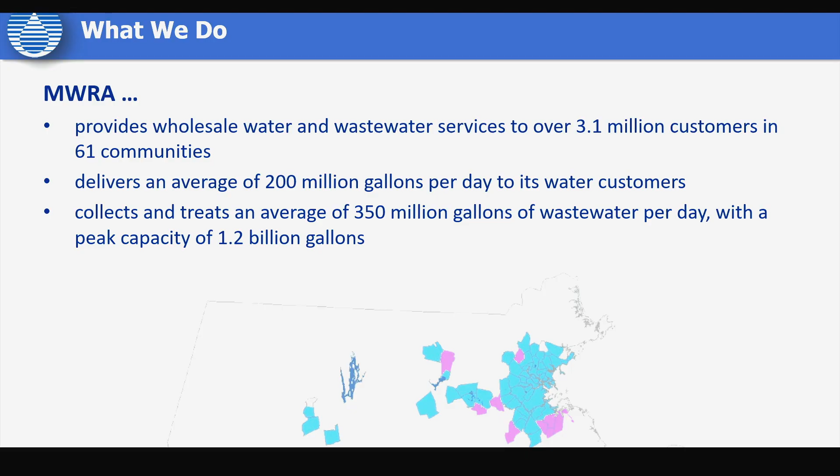What are we? We serve 3.1 million customers in 61 communities. On an average day, we'll deliver 200 million gallons of the best drinking water in the country. On the wastewater side, on an average day, we'll transport and treat about 350 million gallons out in Boston Harbor. In a storm, we can handle 1.2 billion gallons of wastewater. We are the wholesalers. We sell to the cities and towns, and they then turn around and put a markup for the retail rate.

Our main sources of water are the Quabbin Reservoir, north of Springfield, and the Wachusett Reservoir, north of Worcester. All combined, those reservoirs hold up to 5 years of storage if we ever needed it. And that's a far cry from most of our other peers around the country who on any given summer will be below 50% full. We're lucky if we ever get down below 90%. So we have ample water. It's great water. It's the cleanest water in the country, and we'll talk about that in a little bit.

And part of it is the mere size of it and the fact that we own incredible amounts of forest land all around the reservoirs. So the pollutants have no way to get into the water because we own the watersheds. It's a civil engineering marvel that is recognized around the country as one of the great water systems ever built in this country. The Quabbin Reservoir is over 500 feet above sea level.

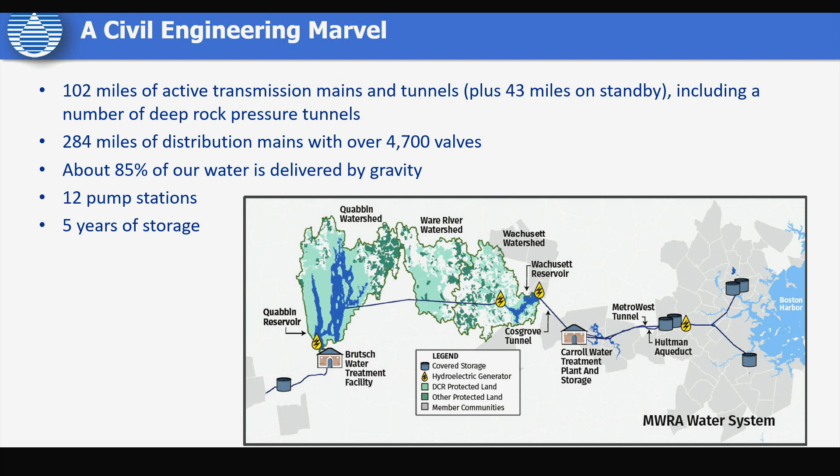The water travels down through tunnels to the Wachusett and then over to Marlborough, and then it drops down into Route 128, and all of it is done via gravity. Once it passes into the tunnel out in Clinton, it doesn't come out until it hits Route 128, and so we are safe there. We have the public health.

We are a public health agency, an environmental agency, and frankly a finance agency and a construction agency. But our main focus is being a public health organization who's responsible for delivering clean and ample quantities of water. And one of the things that, well, I'll wait till I get to another slide on this. We've received all kinds of awards, we meet all the federal requirements. Everywhere you turn, people say, hey, I've got the best drinking water in the country. And people agree, it really tastes great, and it does.

One of the things that people don't think about is the history of the creation of the water systems throughout this country. People understand the need for drinking water, for sanitary things, and all that. That's critically important. But the thing that really drove a lot of the construction of the water systems across the country were massive fires, where the urban areas in and around this country, whether it be Chicago, New York, Boston, or Salem, Massachusetts, didn't have the pressurized water, and they couldn't fight fires.

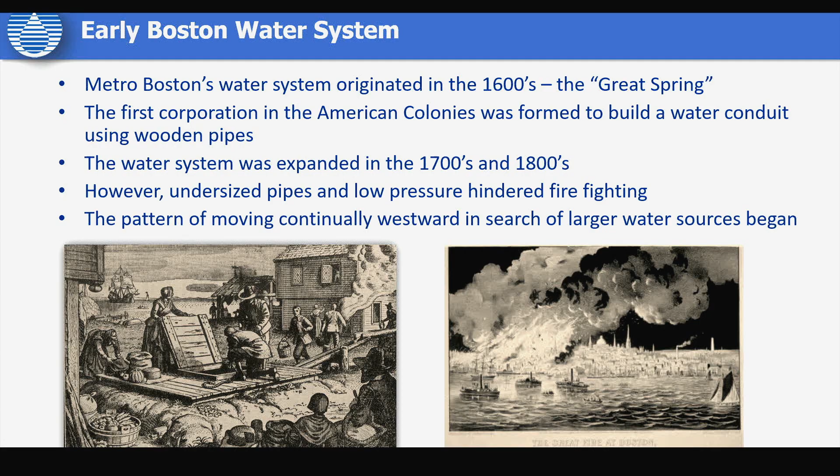They had bucket brigades and things along those lines, hand pumps. But it wasn't until these fires that folks realized we needed to get pressurized water, and we did. The Cochituate was the first part of that expansion from Boston west, and this was a storage tank that was behind the State House, and that has since been eliminated.

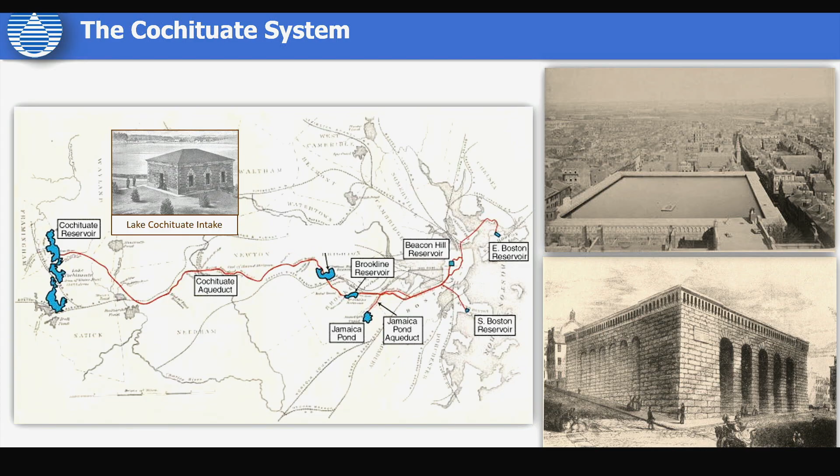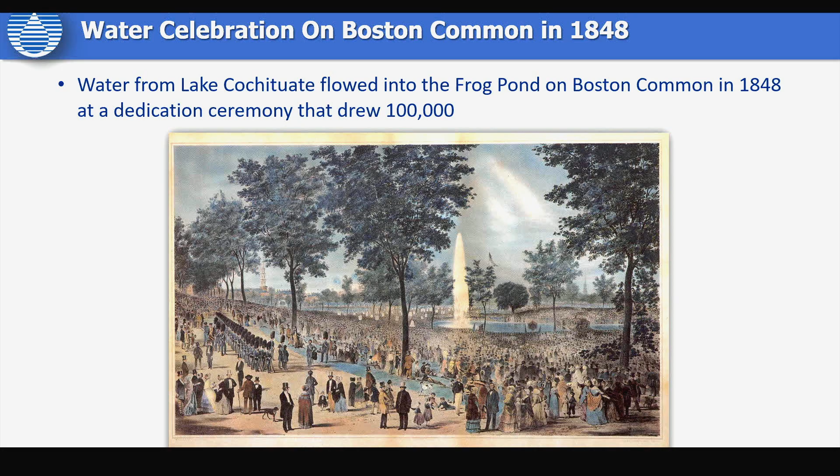The Cochituate system was the first system as part of this drive west. Here is the celebration for the opening of the Cochituate down at Boston Common in the Frog Pond. Over 100,000 residents came out to celebrate this great engineering feat. The history of the Massachusetts water system is basically drive west, drive west, drive west until you get enough water.

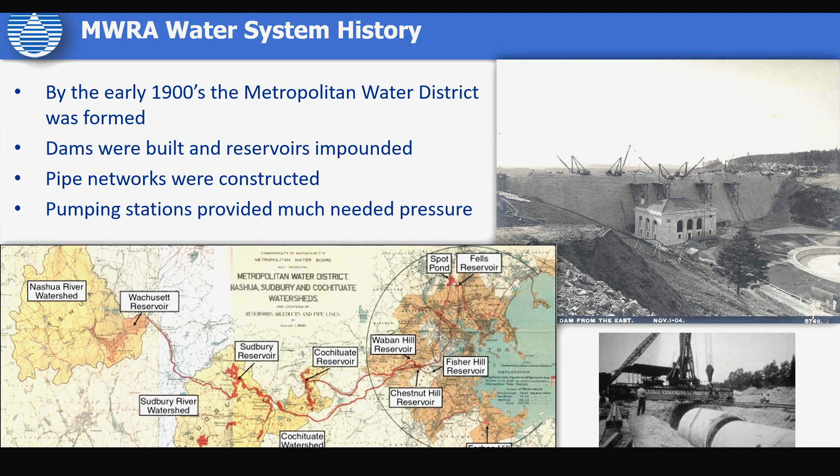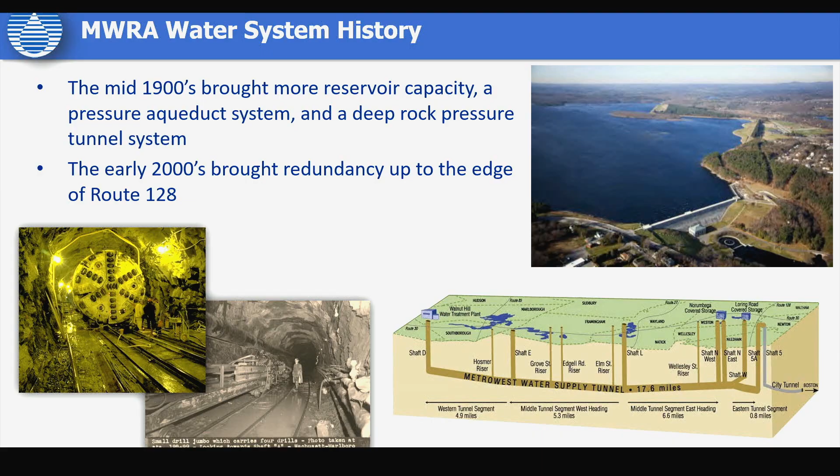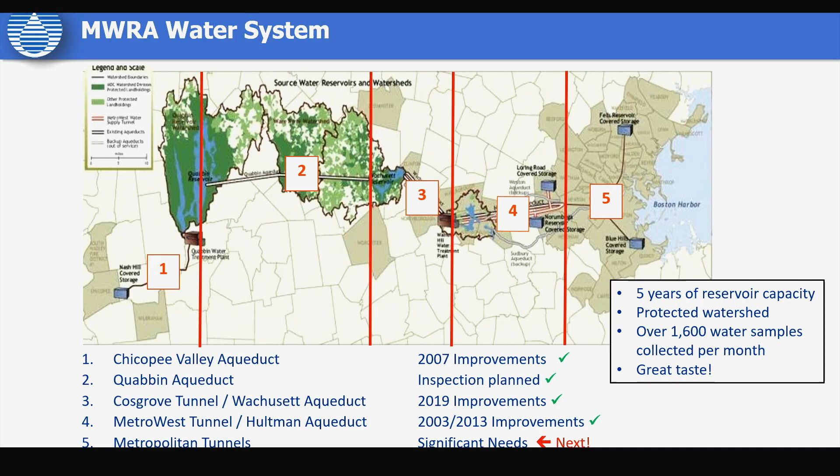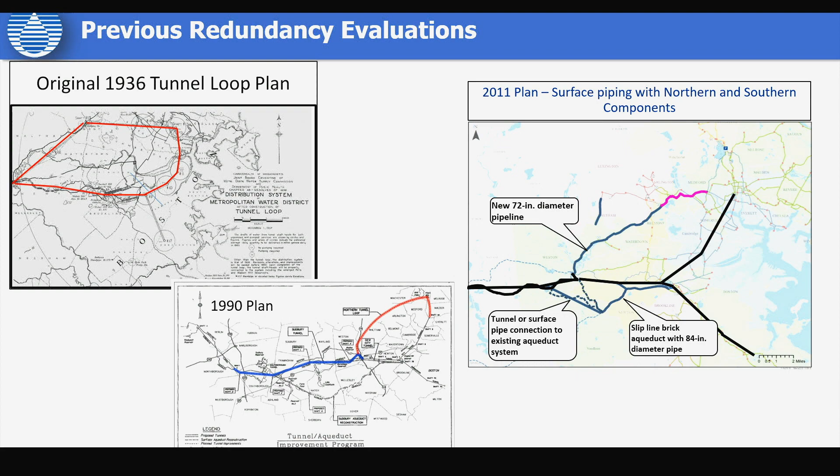We break our system into 5 separate areas, and we strive for redundancy in each one of those. We've been very successful in it, and the system is bold in its investment and its results. We're here today to talk about a tunnel loop that would complete the Metropolitan water system. And it's important to keep in mind, in the 1936 master plan, this tunnel that we're going to talk about tonight was outlined in concept as something that we needed to do as a water system. Now we sit here years later in the planning stages to make it finally happen. And when we finish this, we will be completing the Metropolitan water system that was envisioned over 100 years ago.

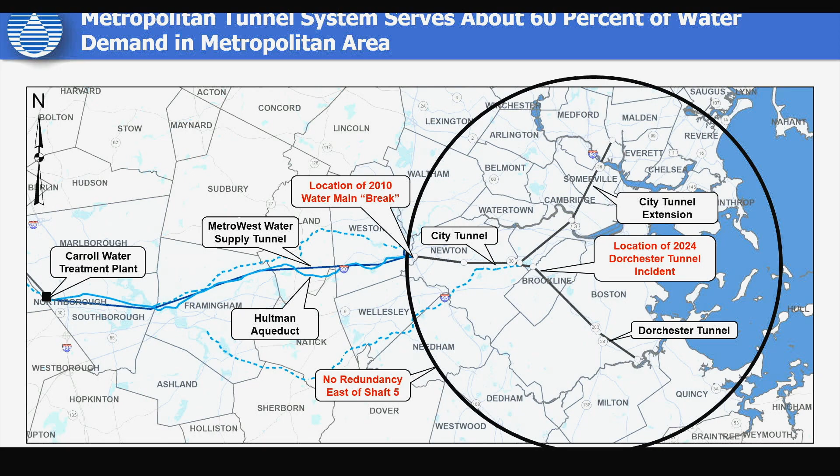The area that we're dealing with inside the circle is about 60% of the water demand in the metropolitan area. And I would say, without being accused of being an alarmist, if we had a major water main break inside of this circle here, there would be the possibility of deaths, as we'd have so much water, and it would just be ugly. And we also have to maintain what we have. And these are examples of parts of the water system that are just very, very tender. The potential of an accident is serious, and we want to move forward with this tunnel program to get rid of these things and build a new redundant tunnel.

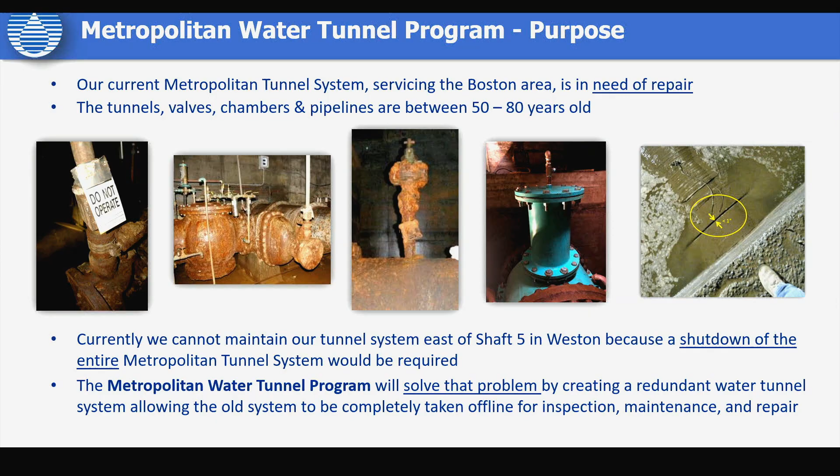Here we go. If we had a major water main break, I'm going to give you a sequential. This is what would go dry first. These areas would dry first as the system drained itself out. Here's phase 2. And it would be ugly. It would be serious. And in the Great Water Main Break of 2010 we got a taste of what it's like to have a major water break. And I can assure you, we don't want to live through that again. So anyway, the goal is full redundancy.

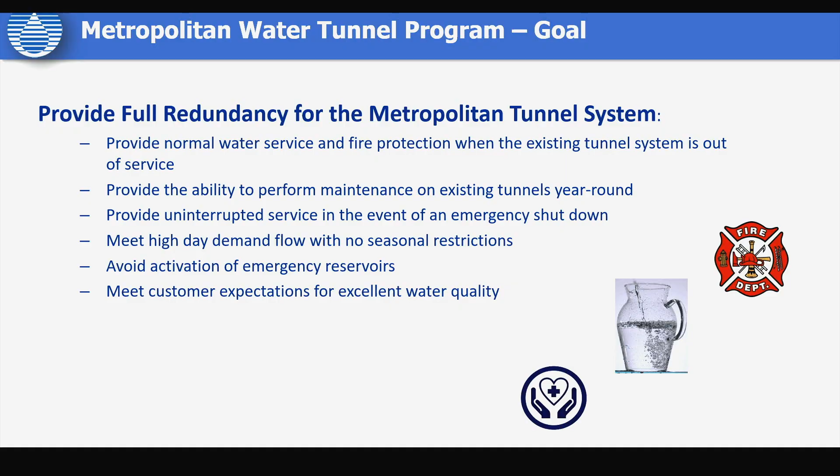Kathy is going to talk about it. And anyway, work for you.

Okay, thanks, Fred. So for the rest of tonight's presentation, Paul Savard and I are going to walk you through the tunnel program. We're going to spend a bit of time talking about how a deep rock tunnel system is built, the status of the program today, and what's to come in the coming years. It's a large program. It'll take many years to complete.

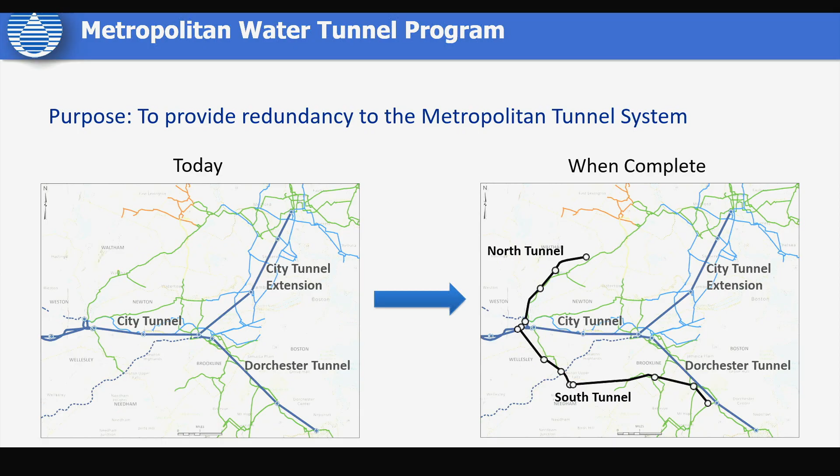So today, as Fred mentioned, we have our existing Metropolitan tunnel system within the Metro Boston area. It's 3 deep hard rock water tunnels. They are about 19 miles in total. When the new tunnels are online, we'll be adding 15 miles of similarly deep hard rock pressure tunnel that will provide full redundancy for these existing tunnels. We'll be adding 13 new shafts to connect the new tunnels to the existing MWRA system and local water infrastructure. And the connections to the local water infrastructure are important because they provide resiliency not only to our system, but to local water infrastructure as well. And as Fred mentioned, it's been in the works off and on for roughly 100 years.

So what is our program? So the Metropolitan Water Tunnel Program, it's really a once-in-a-generation program. They'll provide benefits for years and years to come. It involves the construction of 2 separate rock tunnels. These tunnels will be between 200 to 500 feet below ground and constructed entirely in bedrock. We need 13 shafts to build for construction or the water system connections.

Both tunnels start in Weston near the intersection of I-90 and 95. The north tunnel will head north into Waltham. It's about 5 miles, just shy of 5 miles. And the south tunnel will head east, southeast over to Mattapan. And these tunnels are designed to carry a high day demand of 283 million gallons a day. That's a lot of water.

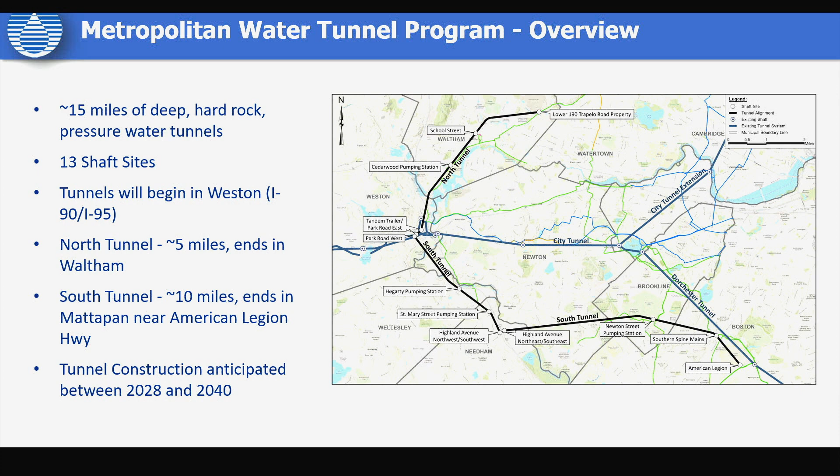So how are we going to build them? The new tunnels will be constructed in 3 segments. We don't build them all at once. And we'll be using tunnel boring machines, or what we call a TBM. And if you're not familiar with a tunnel boring machine, there is a model of one over on a table over there. Take a look. These are really, really marvels of engineering, and they're very sophisticated. So take a peek at that model.

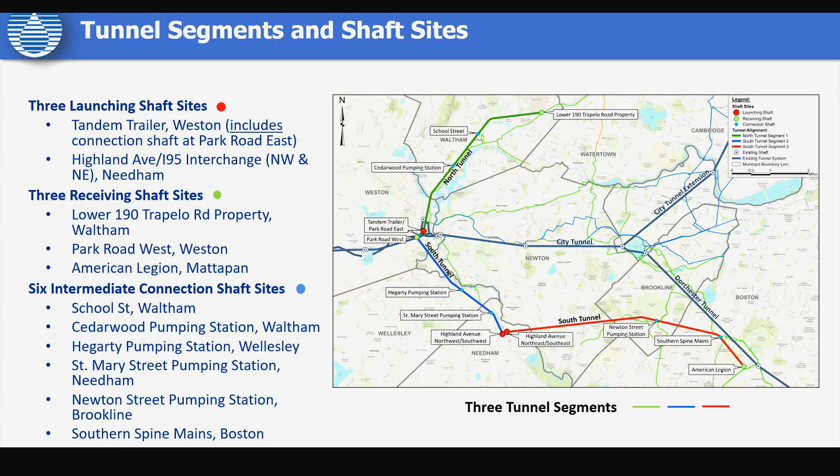So each segment of tunnel is going to have its own launching shaft, its own receiving shaft, and intermediate connection shafts. The launching shafts are where we launch the TBM, or where the mining starts. The receiving shaft is where we receive the TBM or mining stops. And the intermediate connection shafts allow for those added connections to our system or local infrastructure, and that provide that real redundancy. Paul is now going to walk us through typical tunnel construction sequence, review the work completed to date, and some of the work that is yet to come.

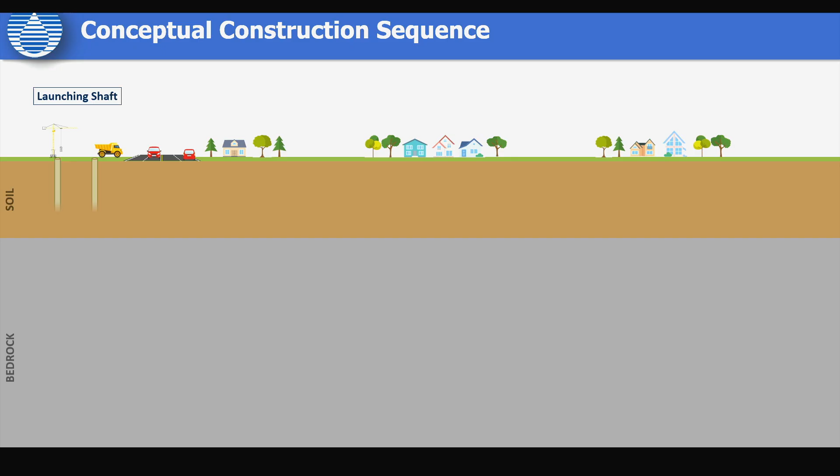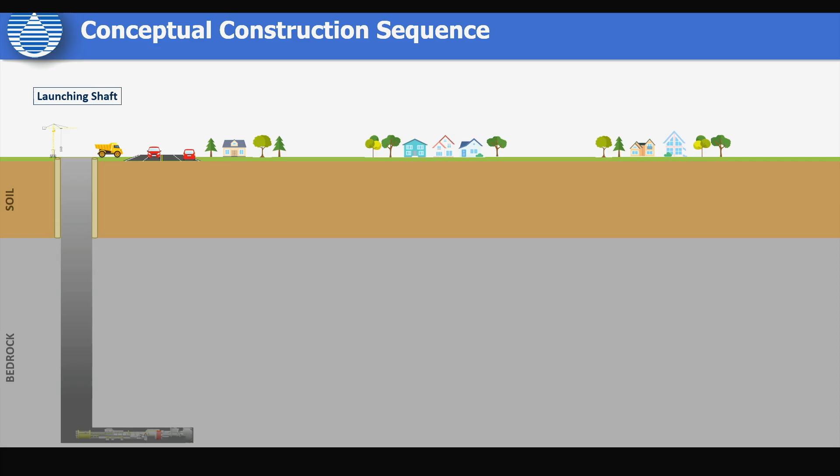But the first step that the contractor will end up doing is they have to mobilize to the launch shaft and prepare for constructing this launch shaft. And as we mentioned, the shaft itself will be on the order of 300 or 350 or so feet deep, and it's through soil and bedrock. And as they get down towards the bottom of the shaft, the contractor excavates an opening that we call a starter tunnel, and that's where this TBM tunnel boring machine is assembled, as you saw in some of the slides if you looked at the posters.

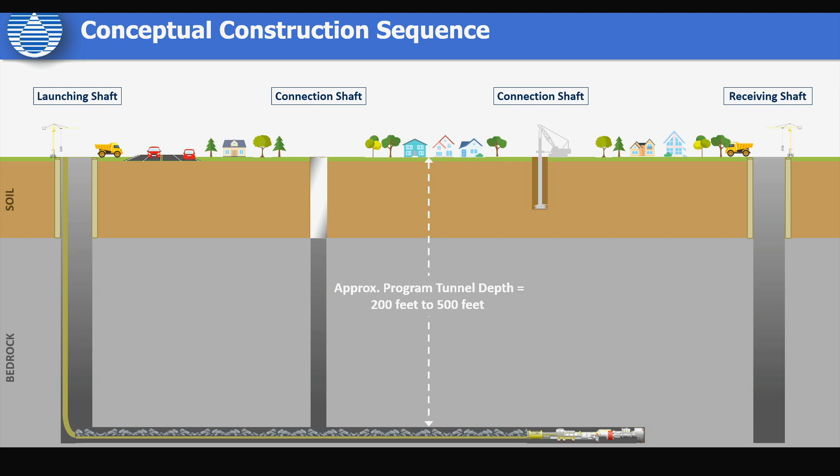So when the tunnel boring machine gets launched, after all that logistics starts to get worked out, it's moving about 50 feet a day, so when you have several miles of tunnel, it takes several years of time for the TBM to get there. In the meantime, the contractor mobilizes to the receiving shaft and constructs that similar to the launching shaft. And as the tunnel's going along, you'll hear us talk about intermediate connection shafts. So those will be connections to the water system, but we're expecting the contractor to construct those using a different technique, which we call raise bore technology. It lets most of the material fall into the shaft so it's less construction activity at the surface.

So that TBM tunnel boring machine makes its way to the receiving shaft, and that's when the contractor takes that out of the shaft. And when that work's done, they still have a couple of years left where they have to line the tunnel with concrete. So depending on the soil conditions, it'll be reinforced concrete, steel pipe in some circumstances. The shafts get lined also. So it takes a number of years at about 100 feet a day to line the tunnel, and that's with this concrete. When they get that completed, the contractor's not done.

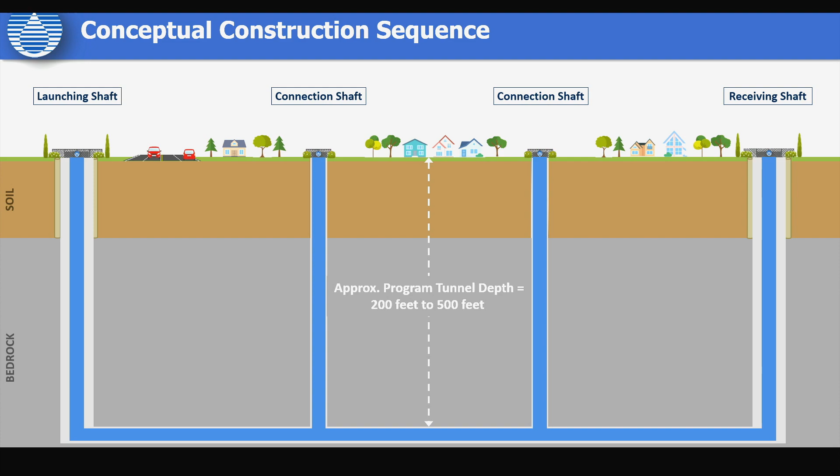They still have a lot of work to do at the surface. They have to complete the water main connections to the water system. They have to build the structures that are below grade for the valve chambers, secure the facilities, and install the landscaping that will make the sites what they'll be like when they're in operation. And then finally, after all of that, the contractor and the MWRA fill the tunnel up with water, we'll pressure test it, and then we get to disinfect and make sure it's ready to be put into service, and we'll do so. So what the animation is good for is to kind of walk through a lot of those sequences for the tunnel construction.

So a lot of people might ask, why did we decide a deep rock tunnel was the way to go? And so early on, the MWRA, we developed a number of different alternatives to look at different options for providing the redundancy that we so desperately need.

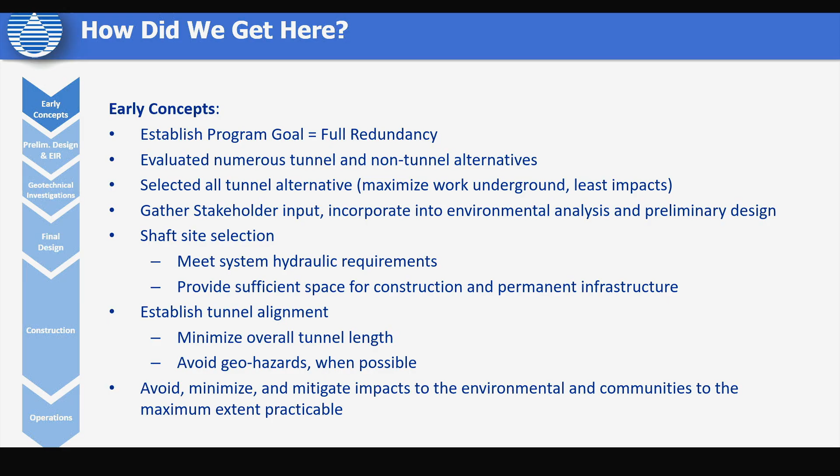So a number of the options we looked at were large diameter pipelines. You need some significant pipelines down city streets if you need to provide a similar number of 15 miles of tunnel. So the disruption caused by construction like that would have been extensive. And so it didn't take long to realize that a deep rock tunnel would be the best way to go to minimize community impacts and make sure that we could provide the redundancy that we need for the program that's so important.

So that decision led us to preliminary design. The preliminary design had been going on; we started in 2020 and we just wrapped up in 2024. So the preliminary design was the step where we identified shaft sites. For the segments of the construction that we need to build, you need to make sure you find the right shaft site, that space that's available for construction. It's got the right size. It's got to be located close to highways so we can get the trucks that need to come in and out and take the material away. So that was an important part of the preliminary design.

We developed the tunnel alignment in between these shaft sites, and we were able to develop an updated construction sequence, a schedule, and importantly, the cost estimate to go along with the work.

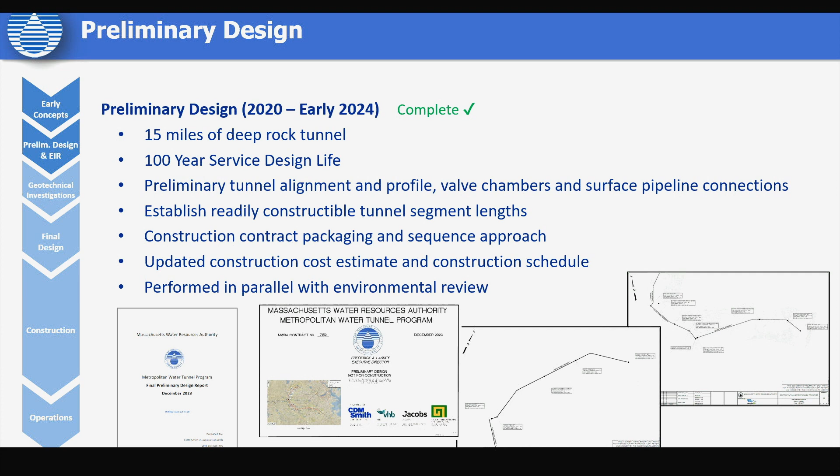So concurrently, along with the preliminary design, were the MEPA filings. The Massachusetts Environmental Policy Act requires us to do an environmental impact report for a project of this magnitude. There are several steps to it. It started with our environmental notification form back in 2021, and we worked through a series of a draft environmental report, supplemental, and then culminated with our final environmental impact report in February of last year. And we received the Secretary's certificate on that in April of 2024.

So in the process of doing the environmental impact report, we're able to take the preliminary design, assess the environmental impacts associated with the work, go back to the drawing board in some cases to try to minimize or mitigate some of the impacts that would be experienced, and modify the preliminary design so that we can come up with a more equitable project that's going to minimize construction impacts and operational impacts to the extent that we can. So that's the main purpose of the preliminary design, working in conjunction with the environmental impact report to make sure that they're both working together.

During the process of the environmental impact report, we received a lot of comments at each step along the way from the public and other stakeholders. So we responded to each of those comments, provided detailed responses, and incorporated what we could into the preliminary design documents to address mitigations and so forth as the project went forward. All of the documents that we've submitted, and they're substantial, are located on our website. You can go see them if you'd like to. There's a lot of information there, and it would be definitely helpful for people to understand the work that's involved.

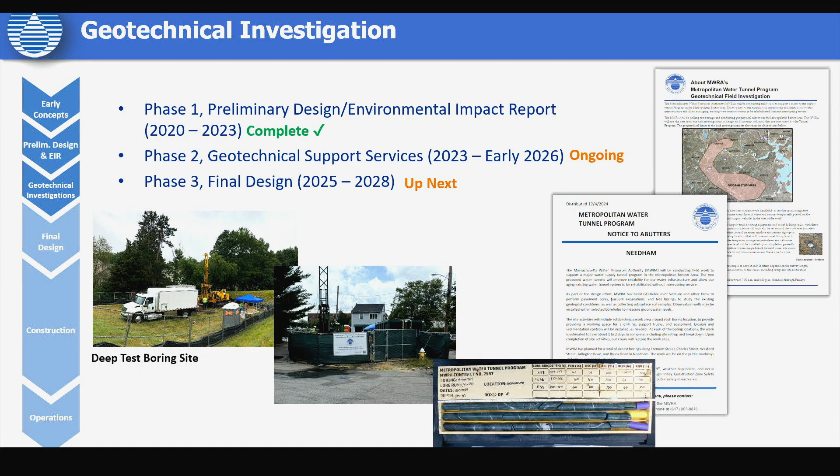And that's all going to feed into the final design so the contractor will know what kind of tunnel boring machine they need to provide. So that leads us to final design after that preliminary design step. And final design is what has just begun and will extend for about the next 3 to 4 years until we begin procuring tunnel construction. There's still a lot of work for us to do and many details to be fleshed out during the final design, and we'll be talking about more of those things as we go forward tonight.

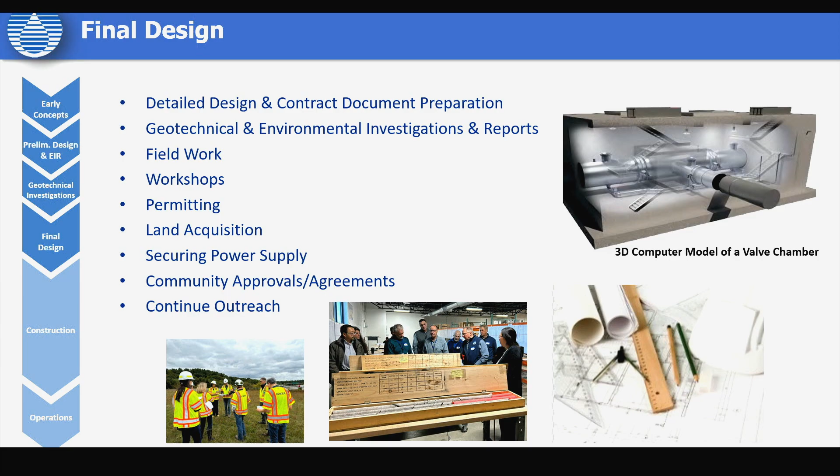So it is during this phase that we will finalize all aspects of the permanent tunnel system, where the valve vaults will be and the design of those vaults, the specific connections to our water system, the final site configurations, and the system operations, all the steps that we need to do to put the tunnel into service. So we'll also be developing additional requirements for construction methods and sequencing, things like work hours and haul routes and so forth, and make sure that we can incorporate any constraints that we need to into the contract documents so the contractor knows what they need to comply with.

So it's going to take a small army of people to bring all that work together for the final design, including our engineers and geologists and permit people and cost estimators and schedulers and so forth. But our final design engineering team, led by WSP, some members in the audience here, have significant experience in this kind of tunnel work, and they'll be working hand in hand with us at the MWRA to make sure such a large program moves forward the way it needs to.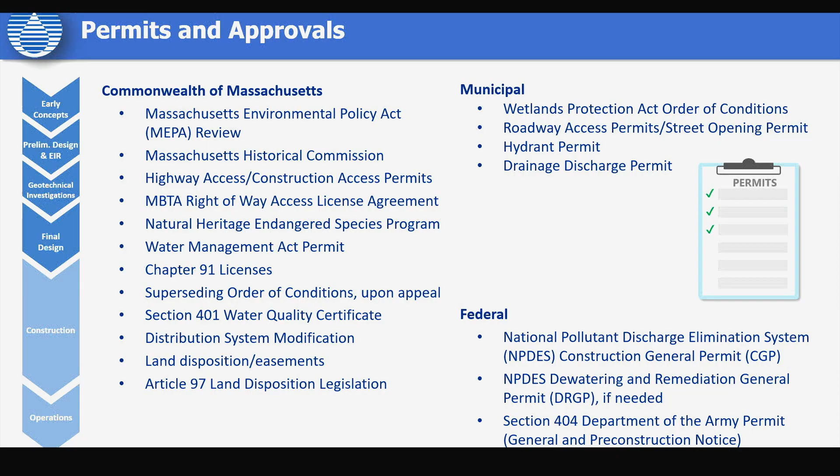A couple slides more about the construction and what to expect there. So again, each tunnel segment is estimated to take between 4 to 8 years to complete. And we mentioned a little bit about the time it takes to construct a shaft, about a year. That tunnel boring machine that operates for each segment, that's going to take a couple of years. Then the lining of the tunnel that has to go on after that. Each one of these are sequential steps. You can't leapfrog ahead of one from the other. You have to complete them as you go. And that's what leads to the final duration of the construction contract.

So we expect work on 3 segments to be overlapping at various times, the green, the red, and the blue. So there will be times when all 3 sections have some activity going on. In addition to the many people needed to complete the design work, we also estimate that at some point during construction, approximately 200 people will be directly employed by the tunnel program. And that's not including any local businesses and others that might indirectly support us. So the specialty nature of this work will require both locally available labor, but will also draw in some national labor.

But starting later this year, we anticipate some smaller construction projects to begin. What we're identifying here is early enabling construction work. And these are smaller projects that we need to get completed before the tunnel contractor starts their bigger work so that they're ready to support the construction that needs to go on. And we've listed them here. There's TBM power that we need to get to the launch shafts, a dewatering line, which is to help provide a pathway for water to go when it infiltrates into the tunnel. And then there's a building demolition and a parking lot relocation that will be involved.

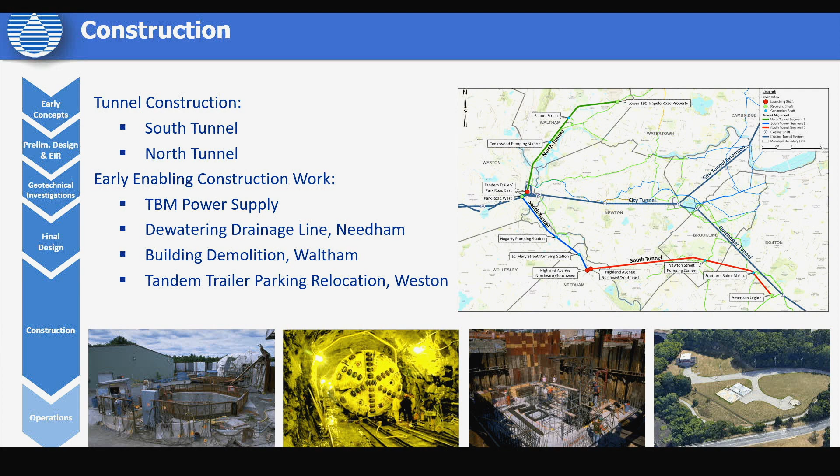Here's a site of some of the Metrowest tunnel project that we did back in the late 1990s and early 2000s. It's a launch shaft that was up at the same Mass Pike area, close to where the North Tunnel would be launching for our project. But it gives an indication of the kind of site that you need during construction. Within the limits of the construction site, the surface activities are predominantly in support of the underground work.

And once mining work starts, the work at the launch shaft will typically be 24/7. So when they're doing the tunnel boring machine operation, the night shift work will typically be a maintenance type shift. So the shafts will be the only access point when they start from the launch shaft. That's the only way in and out of the tunnel. So again, it's part of the logistics of getting everything in and out all from that same spot. It's quite a feat.

Everything and everyone, again, will go in and out through the launch shafts, and the excavated rock comes out that way too. The material for the rock is not processed at the launching shaft, so that's loaded onto trucks and it's taken away for disposal, so the contractor doesn't do anything with the rock at that site. So we don't expect hauling to occur overnight, since the facilities that receive the excavated rock typically are not open during the nighttime.

And all 3 launching shafts for the program are sited inside or at the edge of the highway. So that was an important part of the preliminary design, to find shaft sites for launching shafts that are close to the highway. So when a lot of the material has to come in and out, it's able to get trucks located right on the road.

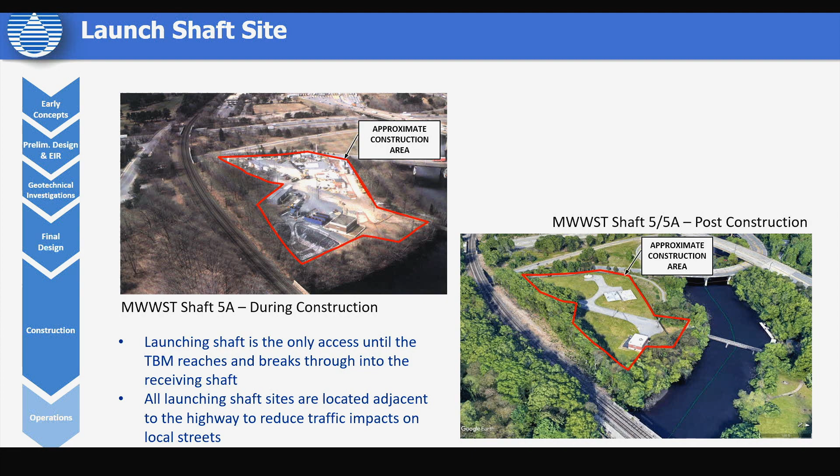So here's a shaft, just to talk about launching and receiving shafts and how those are constructed. So the launching and receiving shafts will be constructed in rock using controlled blasting. They'll be about 25 to 40 feet in diameter, about 250 to 400 feet deep. The controlled blasting is done in short lifts, about 5 to 10 feet, where the rock is excavated and removed. And then they'll do another short blast after that and continue the process down to the bottom of the shaft.

And down at the bottom of the shaft, you can see a little bit of a sense of the starter tunnel that I mentioned in the animation, where the tunnel operation is ongoing. And there's quite a bit of activity down there. You don't notice at the surface how much activity is ongoing because so much of it is going on down below.

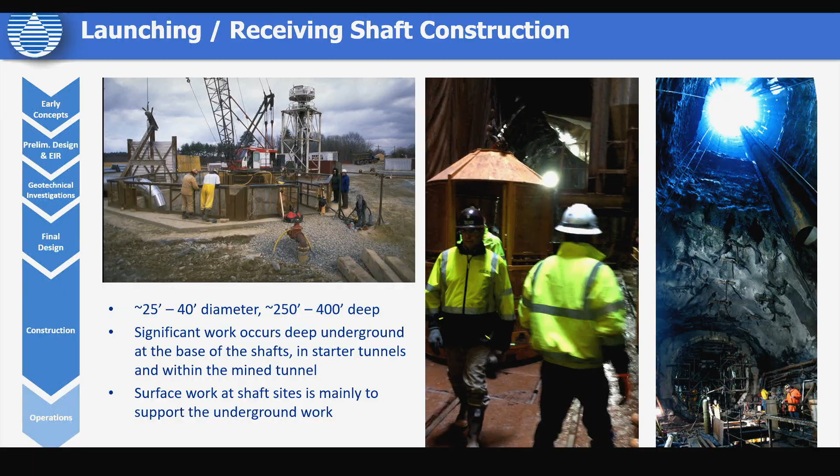So while the launching shafts are being constructed, the tunnel boring machines get fabricated. It takes about the same amount of time for a shaft to be constructed as it does for the tunnel boring machine to be fabricated, so the timing there works well. Then they'll set it up and launch the machine.

We talked about those intermediate construction shafts and mentioned this raised bore technology and how that's used to help mitigate the construction impacts at the surface of these facilities that are not so close to the highway. So the methodology basically goes step 1 and 2: a contractor excavates through the soil and installs some support of excavation. And then step 3, they'll drill down to the depth of the tunnel with a pilot hole, and they essentially drill through into the tunnel.

And then they attach this reamer down at the bottom of the tunnel inside. And as the reamer is pulled up and rotates, it grinds away at the rock. The rock falls down into the tunnel. And then the contractor is able to scoop that up and bring it back to the launch shaft and remove it the way where they're already set up to handle that kind of material.

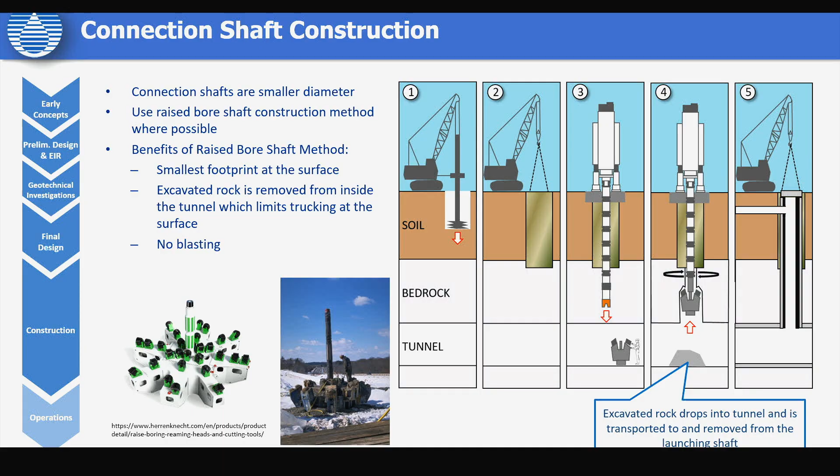And with that, I'm going to pass it off to Kathy, who's going to run us through a few more discussions about the project. Okay, great.

Thanks, Paul. So one of the unique aspects of underground construction is responding to emergencies, which can be really challenging. As Paul indicated, for long periods there's only one shaft, one way to get in and out to the underground work zone. And there is a large underground work zone between the shaft, the starter tunnel area or the cavern, and then the tunnel itself. So proper training, equipment, and coordination is essential should there ever be an emergency underground.

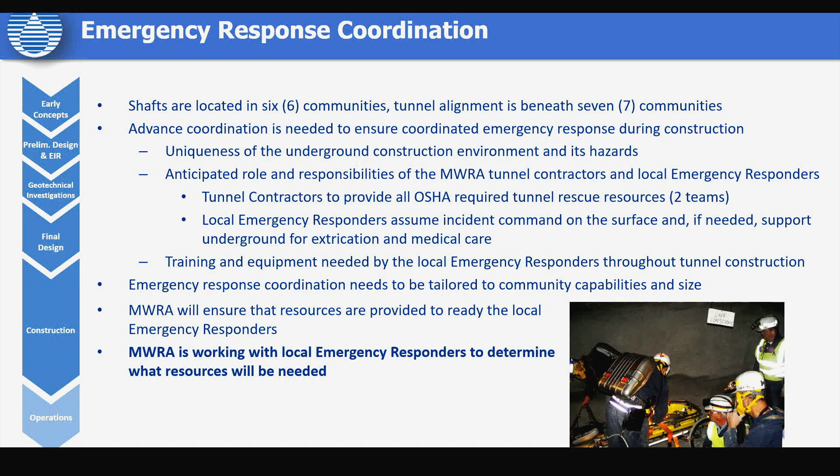Because access to the tunnel and conditions inside the tunnel change over the course of construction, this needs to be well coordinated and integrated. So we've already begun talking with the emergency responders from the 7 communities in which the program, the 15 miles of tunnel, will be built, some of whom are here today, and we're delighted to see them. And the MWRA is working with them to make sure that they have the resources they need to be able to respond to this unique environment should there ever be an emergency.

So the launching and receiving shafts will also be important locations after construction to control the flow of water once the tunnels are in operation. And this is a large volume of water, so we need some pretty sizable valve chambers. These valve chambers or vaults typically extend a couple stories below grade. You'd be amazed how large they are, and allow for interconnection of some very large diameter piping and valves.

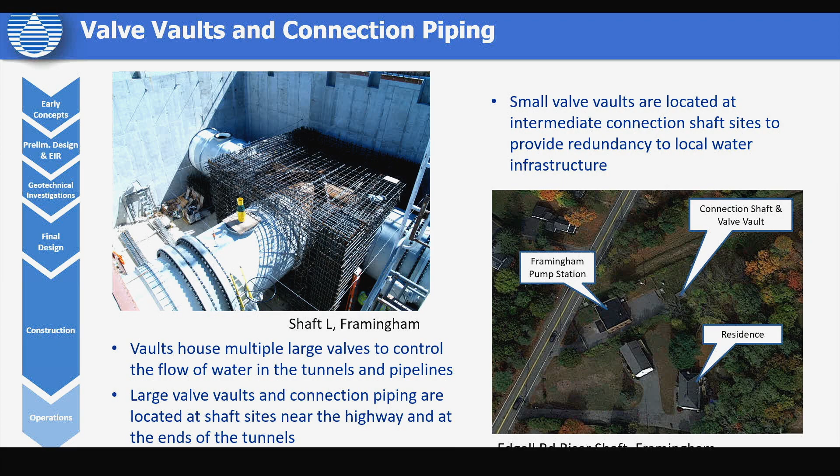It's interesting, this work, the piping and the valves are so large that the structure is built around them. You build the floor, you put the piping and the valving in, and then you put the walls and the roof on top. That's not your normal construction, but that's how this is for such large piping and valves. The intermediate connection shafts are much smaller, but they're really important because they provide that added connection and resiliency to the local water infrastructure.

So although most of the new system is in the form of tunnels and shafts, we do have some near-surface pipelines that need to be constructed. Each of the 11 shaft sites that will connect includes different amounts of surface piping, ranging from as little as 60 feet to as much as just over 500 feet, with the majority of the new piping within the shaft sites or off-road.

One site down in American Legion, at the end of the South Tunnel, we have about 3,000 feet of new pipe to install. This location is key for us because it provides a robust connection between the new tunnel system and the existing Dorchester Tunnel. And although there's a fair amount of new piping there, only a small portion, about 16%, is actually in roads. Most of it is off-road or within the limits of the shaft site.

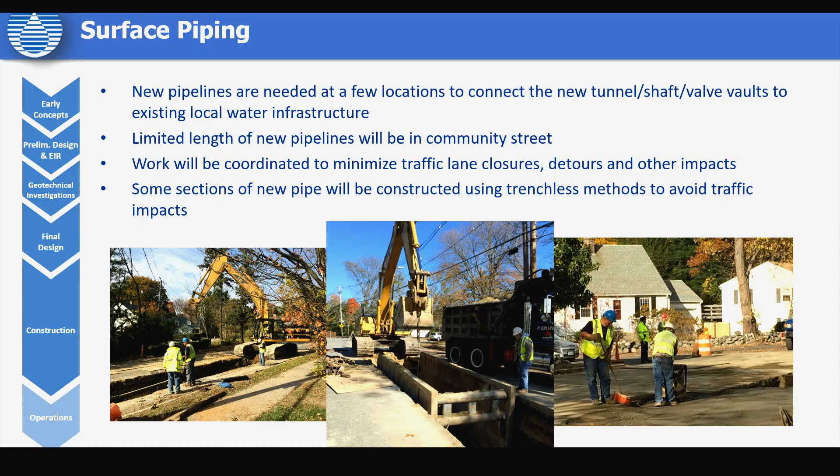Because so much of this new piping is not in community roads, the impacts on local traffic due to this program will be minimized as much as they can, and the need for any lane restrictions or detours is minimized. And wherever we need to do those, we'll work with the local communities to figure out how to do that with the least impact on the public.

So what does this look like when it's all said and done? The finished infrastructure at most of these sites is just going to be a top-of-shaft structure and valve chambers, all below grade. At the intermediate connection shaft sites, the permanent infrastructure is smaller, but it is important. What you'll see is basically a concrete slab that sticks up about 2 feet above grade and some area for parking.

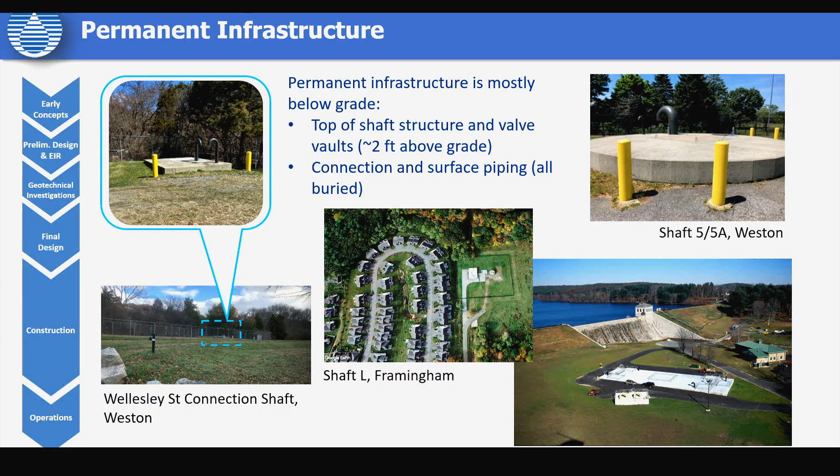At the Highland Ave interchange, we have 2 shafts that will be built, but only one of them will become part of the permanent infrastructure. The other will be backfilled and the site restored; it will be just used for construction. And of course, all the sites, as Paul mentioned, will be landscaped, fenced, and secured. This is water supply. Post-construction, our operations staff will incorporate these new facilities into our water system and will manage and maintain the facilities.

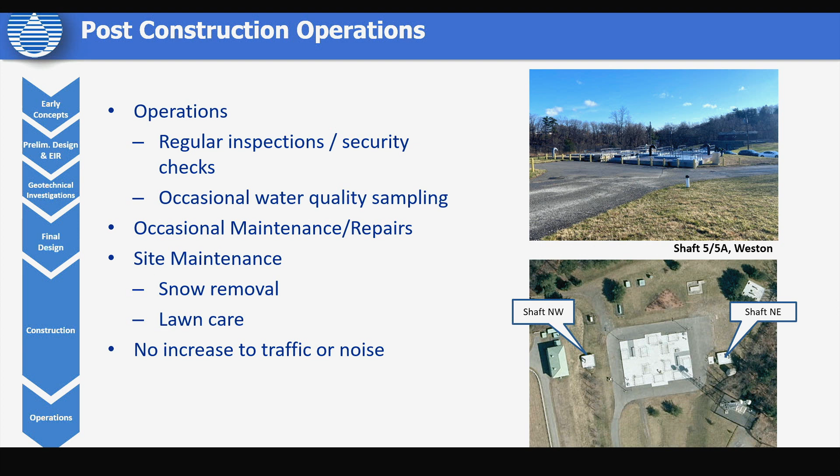So throughout this design and the environmental review process, we've been meeting with communities and key stakeholders through a variety of methods to provide input on the program and also to get feedback. As Paul mentioned, there's an iterative process: preliminary design, environmental review, adjust the preliminary design, and go back and forth, and that led us to where we are. We've held at least 150 meetings with communities, state agencies, and stakeholders.

And since 2021, we've had a tunnel program working group established with representatives from each of the communities in which the program will be, and they've really helped us understand and refine this program. About 60% of the residents in the MWRA service area live in EJ populations, and this program serves both EJ and non-EJ communities. As part of the EIR, we analyzed potential impacts on EJ communities and determined that no EJ community would be subject to disproportionate adverse impacts.

We also recognize that extended outreach is critical for such an important program, and consistent with MWRA's language access plan, we're providing access to information on the program in several languages, ensuring that notifications to events like tonight are disseminated widely, and that anyone who attends, even those who might need interpretive services, have the same opportunity to learn about the program and provide input.

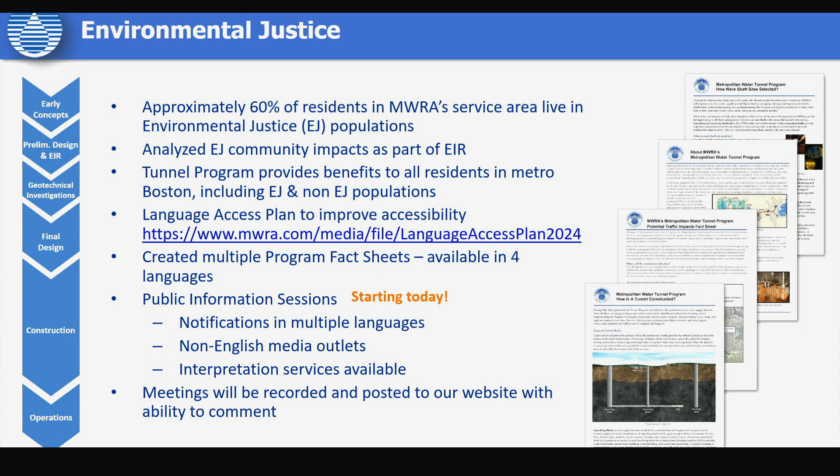So what's our schedule? Preliminary design is done, as Paul mentioned. Final design just began and will run for a couple of years. Power supply, which is really important, will begin later this year to bring power to the South Tunnel, and the drain line construction to provide a way to get dewatering water out of the cloverleaf at Highland Ave over to the Charles River. That drain line, we hope to start that next year.

We're targeting to start the South Tunnel construction, which will be 10 miles, in 2028, which means in 2027 we have to have everything ready to go. And then the North Tunnel would stagger a year, 2029, which means in 2028 everything needs to be ready to go.

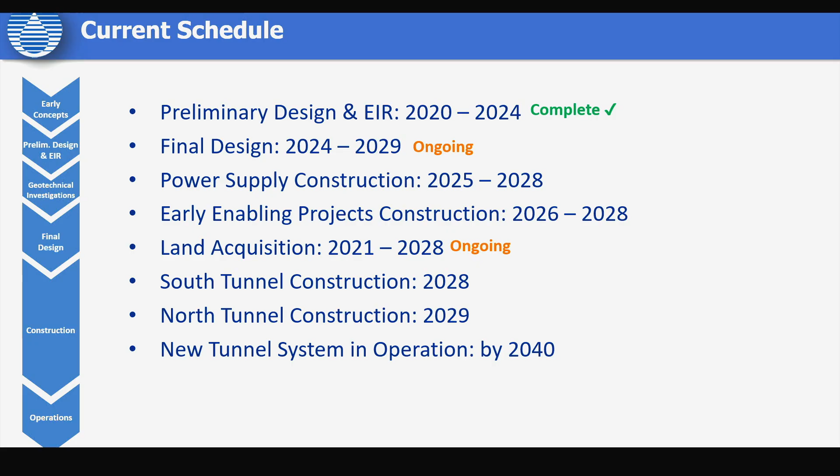There's a lot of information on this program. We have a separate page set up off of mwra.com where there's program information, program history, reports, documents, all the environmental documents, meeting agendas. This presentation will be there, and any notices for specific communities. We have specific pages on that website for each community that have notices or what have you specific to that community, so people don't need to look far for something that's relevant to them.

If you have any questions, there's an email address for questions, or Carmen DiMaria, our Community Relations Coordinator, is here, and his business cards are back on the table behind you, so you can grab one of those if you have a question. And if you haven't had a chance to look at the poster boards and talk to some of the staff about tunnel construction and what's planned, please do so. It's really fascinating. This is a once-in-a-generation project, and we are more than excited to share it with you. And so with that, I'm going to say thank you, and we'll open for questions.

If anyone has any questions, I'd be happy to bring you a microphone so that the staff can hear.